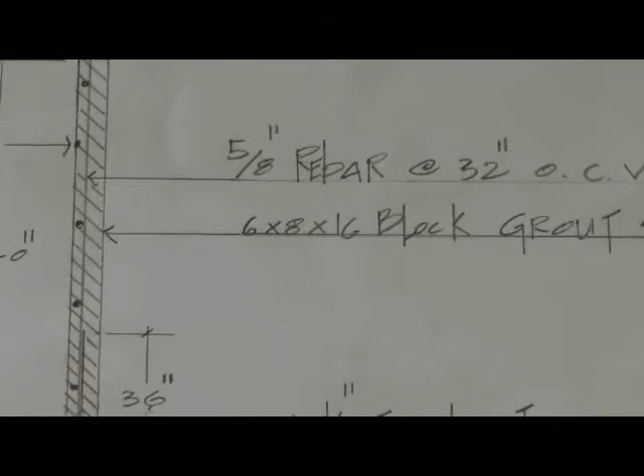That's hopefully what they'll do. I'm hearing stories that they're not grouting every cell or whatever, but over here, and I know in Canada, we probably do things a little bit more solid than they do anywhere else in third world countries. But hopefully the Lord will provide for them to grout this wall solid. So it's very, very important that they try to grout solid. Every cell, the whole distance of the whole building, grout, grout, grout, the whole building.

Okay, CJ? So that's real important. Now, so here we have, let me catch myself up here. Remember I showed you detail 1, and I just showed you that detail right here of how we're going to build it, how this thing should do. And then here's the total height.

I put a note here, CJ, it says see note A. Now I'm going to shoot over camera to note A. Okay, and it says here, build wall to 3 feet bond beam, grout entirely to top of cells prior to continuing to 10-foot height.

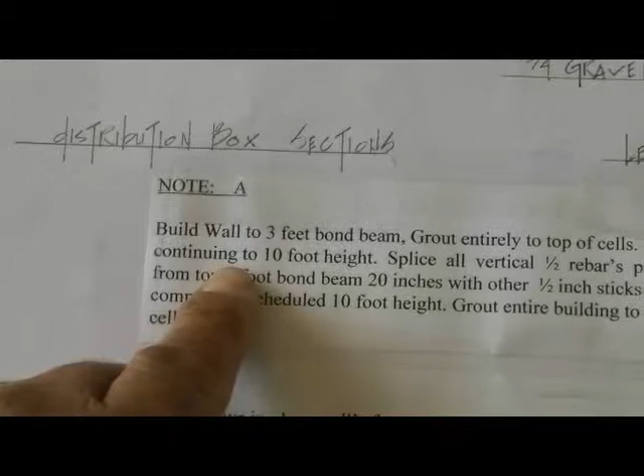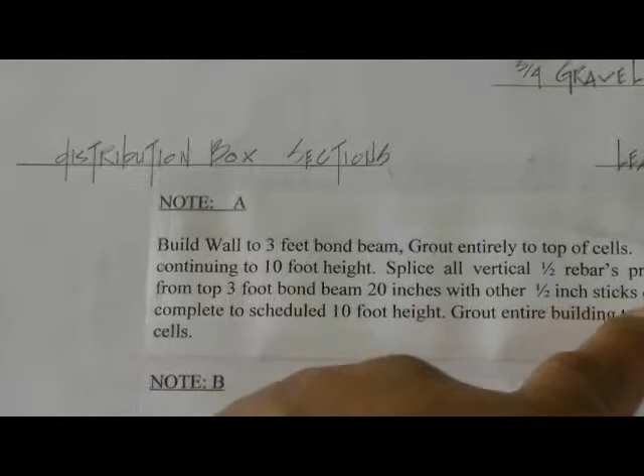Splice all vertical ½ rebars protruding from top of 3-foot bond beam 20 inches with other ½ inch sticks of rebar, and complete to the scheduled 10-foot height. Grout entire building to top of cells. I'm hoping you guys will be able to do that, and there's a budget for that.

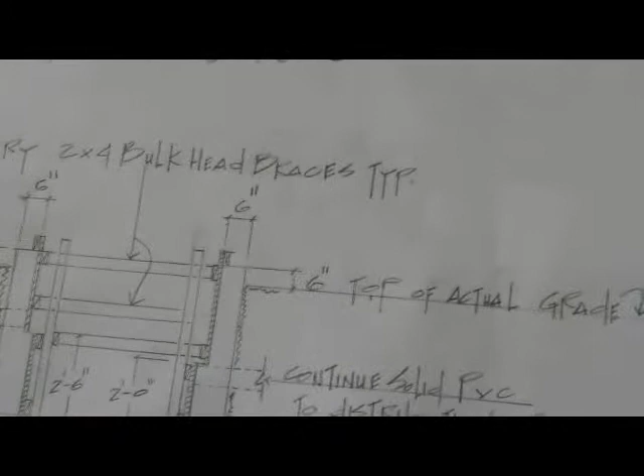Now, so follow the notes, okay, buddy? Follow the notes, and this should perform well. Now, let's go to detail number. Remember on the other page I told you that I showed you a little the septic tank, and it said section. Let's go back to that.

Here it is right here. I said I have section 1, section 2, section 3, section 4. Okay, now that's on page 1 that shows the complete layout. Now let's go to the page we just came off of, and here's the detail to put those walls together.

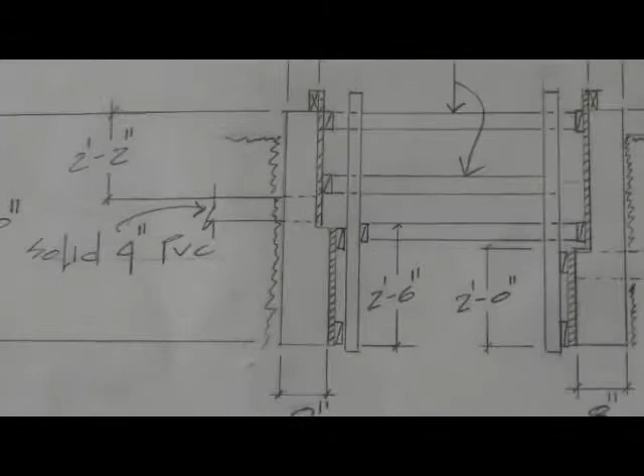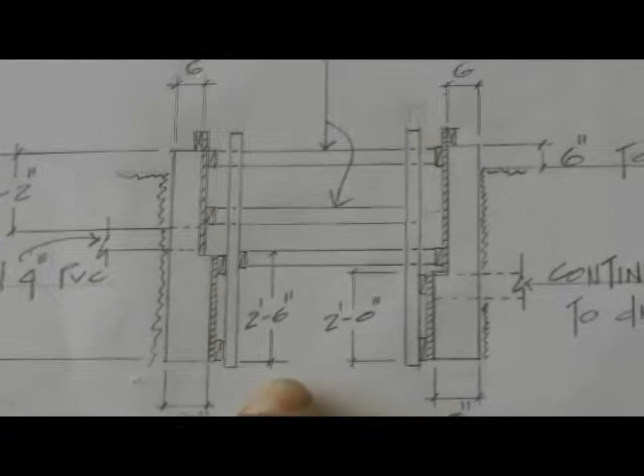Now, CJ, this is detail number 2. Now, try to pay attention as closely as you can, because without my knowledge of them knowing how to do pour in place, it's very difficult for me to try to just depend on what skills they have down there. So the Lord put it on my heart to go ahead and show them how to form this thing up. It was a little bit more work, but I think it's necessary.

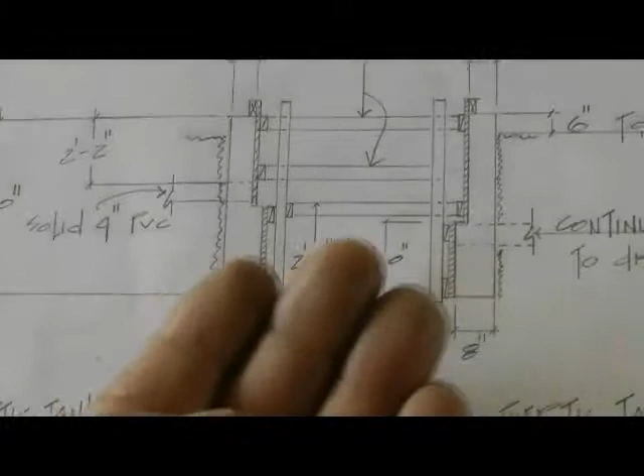Now, this is section 1, this is section 2, okay? They're going to work opposite each other because they're going to be part of a marriage that has to be built first before section 3 and 4. Now, if you notice right here, CJ, it says from the top of the, first thing we're going to do is see this little squiggly line. That's the pit you're digging. All right, it's going to be here, and it's going to come up again.

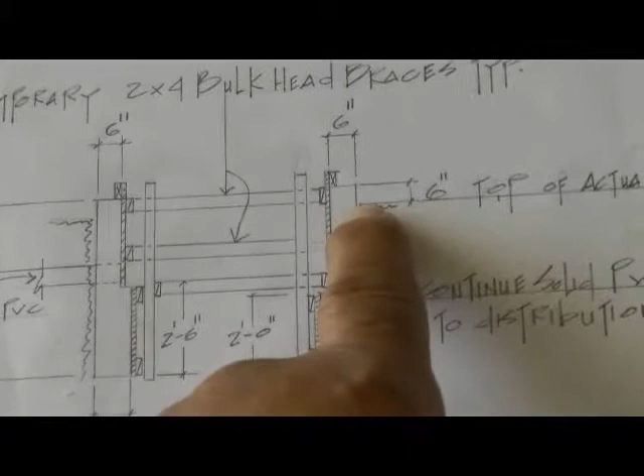It says here 6 inches top of actual grade. That means that the top of this septic tank will be sticking out 6 inches from the top of grade. So that means everybody's going to have to dig down 5 feet, because the whole entire thing is 5 feet deep. Okay? Now, one note I need to mention, and please don't let anyone forget this.

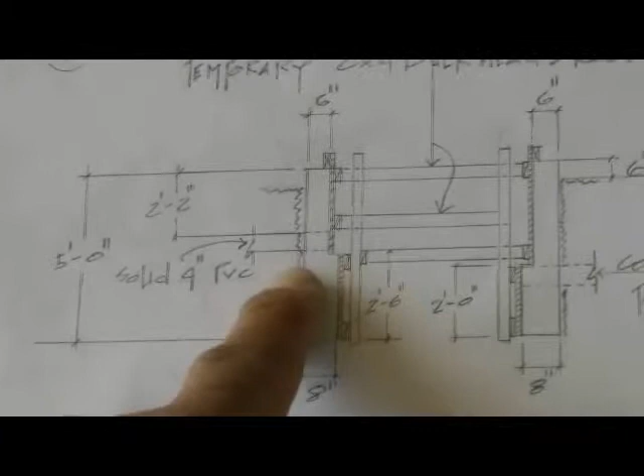Who's ever going to be pouring this thing, after you've pretty much formed, what this is here, let me just go here. Temporary, it says here, see these arrows pointing to this piece of lumber and this piece of lumber? If you'll notice where it's coming from, the note says temporary 2x4 bulkhead bracing. It's typical. So we're going to, whatever kind of system they have down there to hold this piece of plywood.

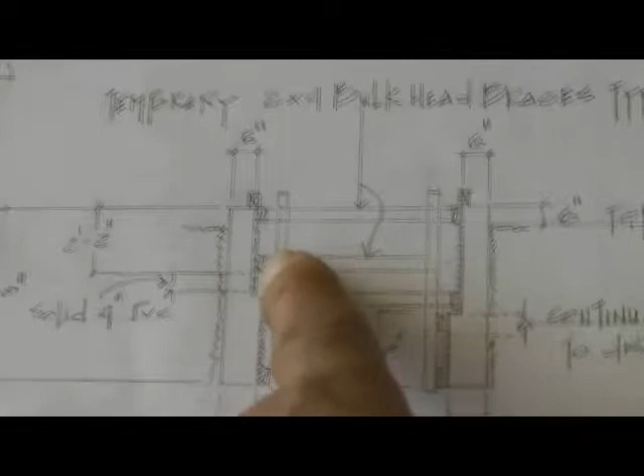See this plywood right there? It's hatched. That's all it is, plywood. I don't know what you guys have there, but anyway, that's what that basically is, plywood.

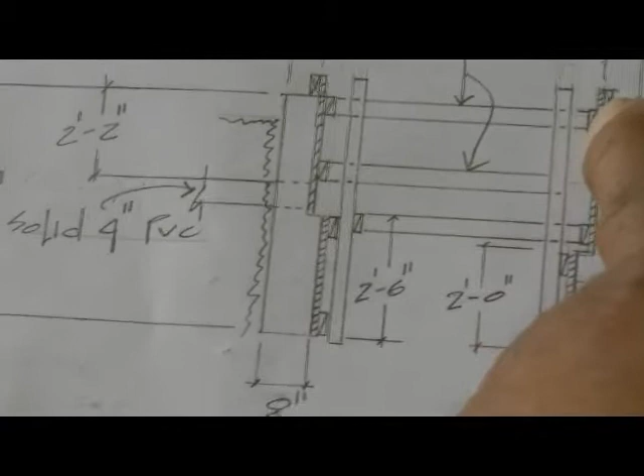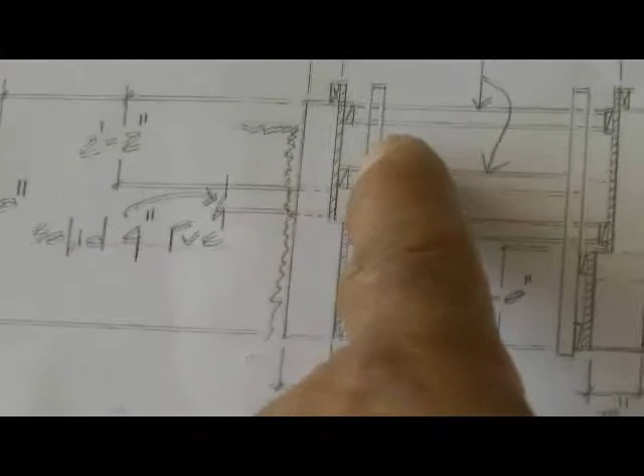And this is the 2x4, and it's holding this piece. This 2x4 here is running crossways, and so is this one here, and then this one here is nailed into that one, and they're probably going to be nailed in maybe 16-inch on center, so they press against both sides, because after you dig the hole, you got to establish this plywood in a place so that this becomes 6 inches, and then you're going to pour this thing.

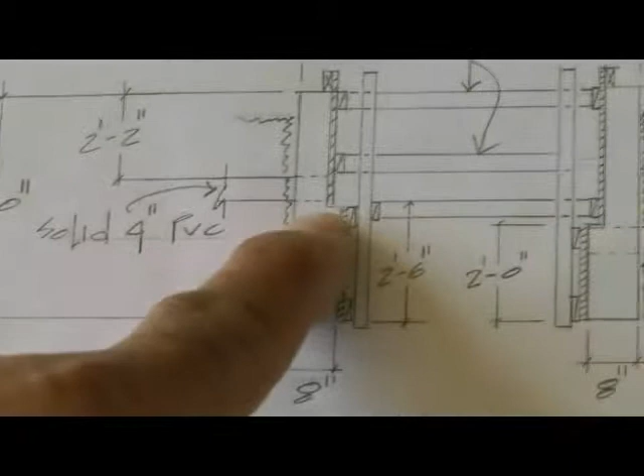But before you do, note here, this has a little pedestal sticking out, and this one here is a little bit higher than this side. Why? Because we're going to try to design a plate or some type of a basket system that can set on this to here with a little bit of a slope angle on it.

So that when the debris comes in, this solid line, it says there's solid 4-inch PVC, and this debris is coming in from the bathrooms. So when the debris comes in, the liquid's going to drop, and so is the solid waste, the toilet paper, what have you. And we're going to be able to pull this basket up later on, and they'll be able to burn the material, but yet the liquids will settle down into the bottom of this thing.

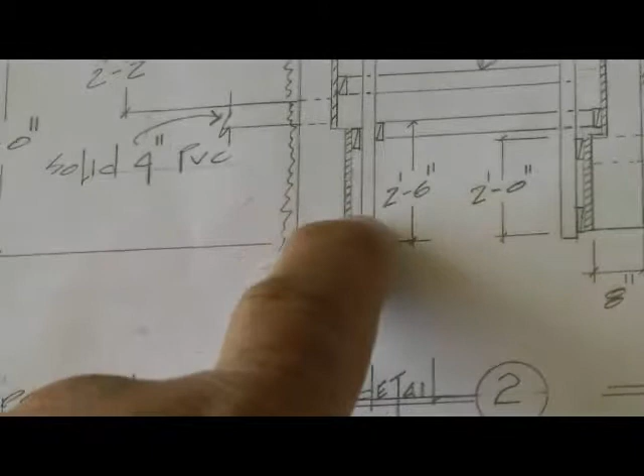Now, the bottom of this thing, I don't have a bottom on it because I needed to put these numbers in here, but the bottom is really about right here. So we want it to be about a 4-inch thick piece of slab of concrete, the rest of it dirt, kind of sloped in this configuration, so that when the liquids drop from here to here down into this basket, into the well, they'll be able to drop.

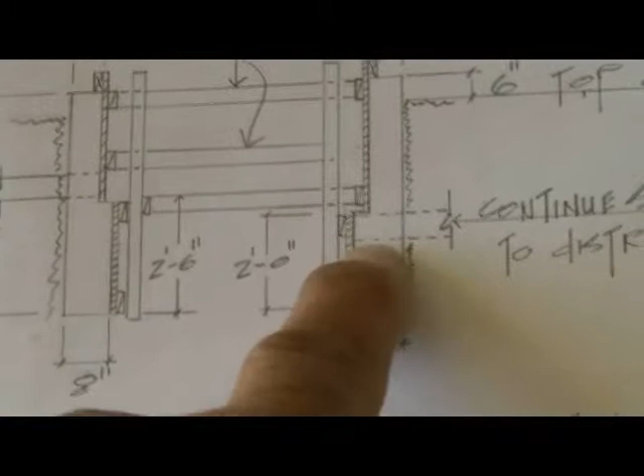So see here, it says here, continued solid PVC to distribution box. Now, this pipe is just below the drop, so that means the slope will be from the bottom of this to the bottom of this. So it'll be about from here to here, be 4 inches, and then the rest of it is all dirt. But we just want to maintain that slope.

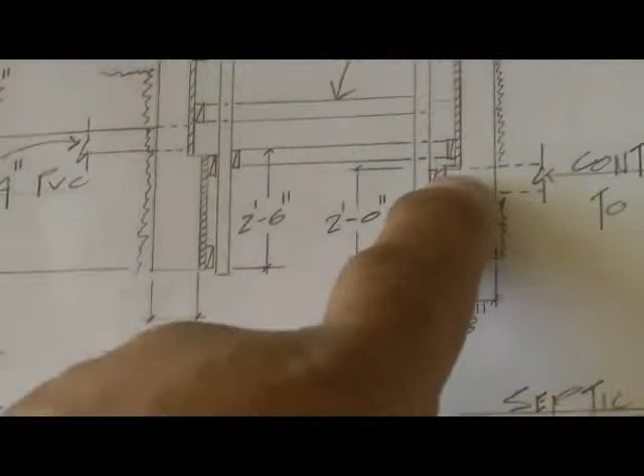So if you set your form to 2 feet this side, section 2, set your form to 2 feet 6 this side, section 1, you'll get this slope in here, and later on they can design a basket that'll set into this little ledge, so that later on when they pull the lid off of the top of this thing, they can take that basket out, burn the debris, put the basket in, and let the liquid take over from there. Okay, so that's the idea there.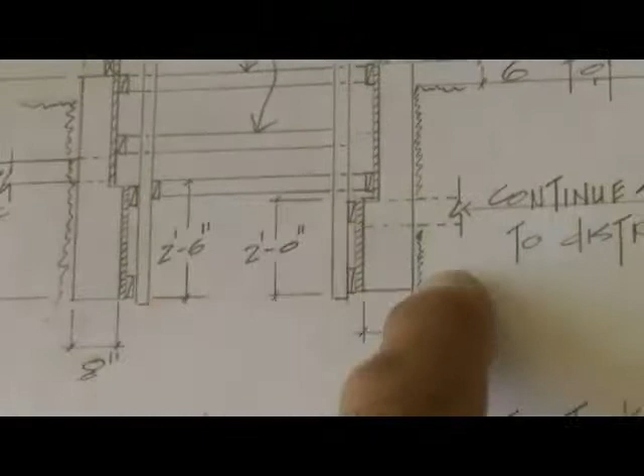Now what I've done here, CJ, I've established 2x4. Okay, it says here 1/2-inch plywood bulkhead. This is typical all around, and this is what it looks like in cross section.

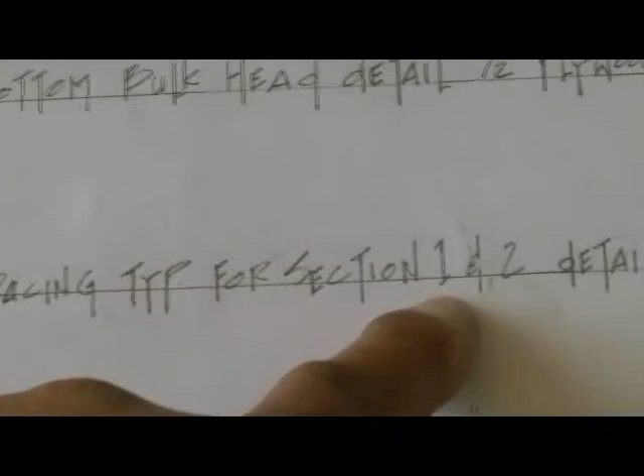Let me see. Yeah, so we're dealing with the same section here, section 1 and section 2. So this is the plywood. It says bottom bulkhead detail, 1/2-inch plywood right here. Now see these cross members here? This is 2x4 used for bulkhead bracing.

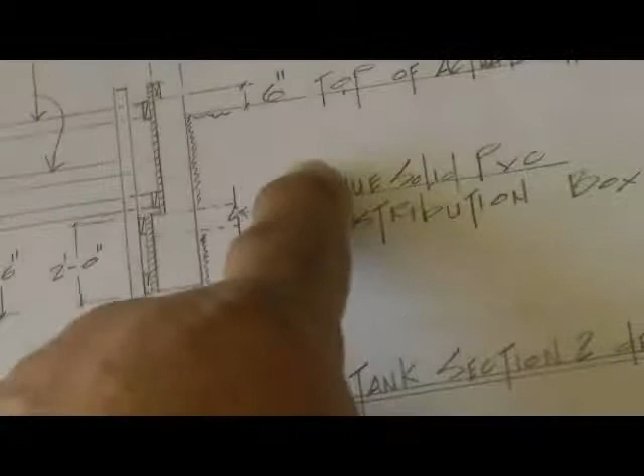Here again, 6 inches top of actual grade. Everything is pretty consistent with detail 1 as far as the grade is concerned, except for this is the cross section. So this is looking at it. This would be looking at it. On the other side of this plywood would be the finish face. This is where our pipe is, a solid 4-inch PVC.

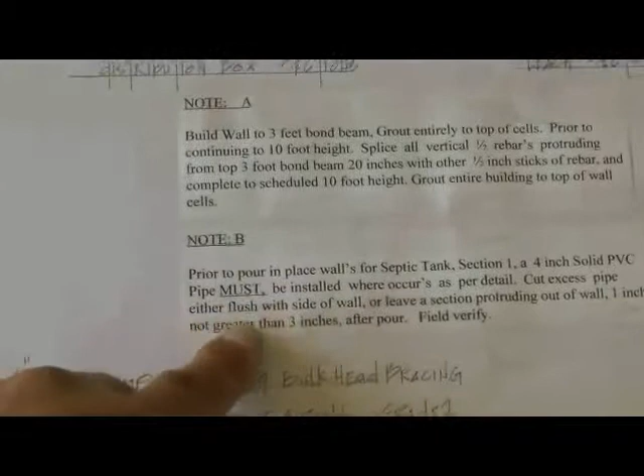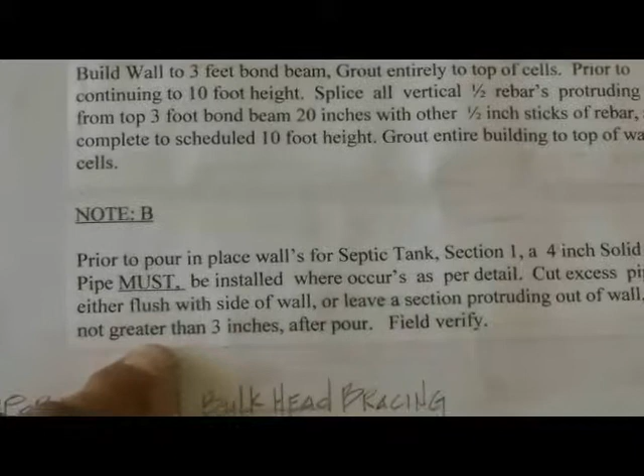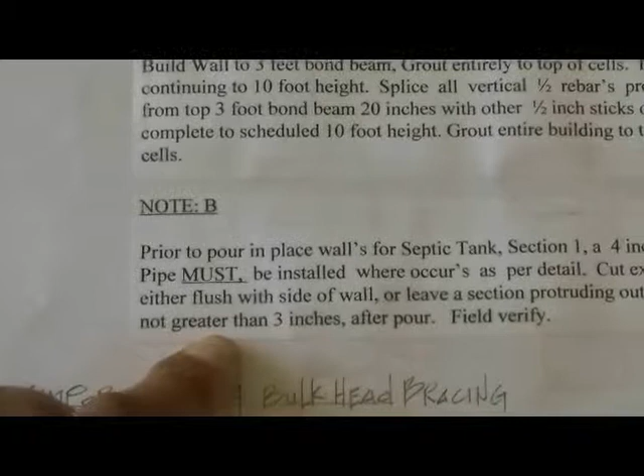Now here again I have a note here, see note B? Let's shoot over to it. Here we are, note B, and let me read that for you. It says here, prior to pour in place walls for septic tank, section 1, a 4-inch solid PVC pipe must be installed where occurs as per detail number 1. Okay, and then you cut the excess pipe either flush with the side of the wall or leave a section protruding out of the wall 1 inch or not greater than 3 inches after the pour.

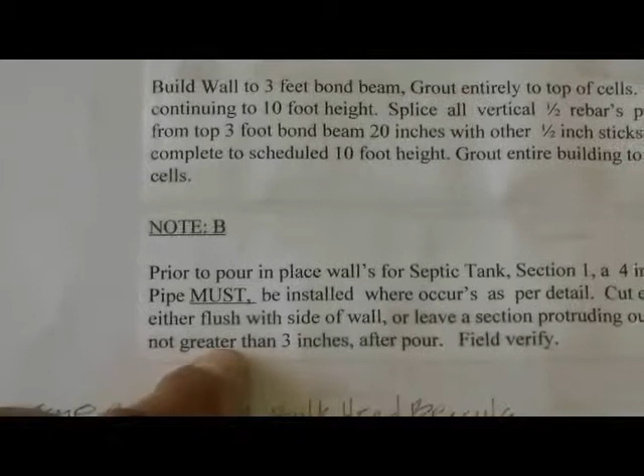You field verify, meaning that once you get that pipe set in there, okay, run it out about 3 inches or whatever, just leave it in there in the pour. Pour your mud and everything. Then when this section's done, then you can cut it off, either flush with the face of the finish or leave it out a little bit, as long as it's out enough to drop into the basket.

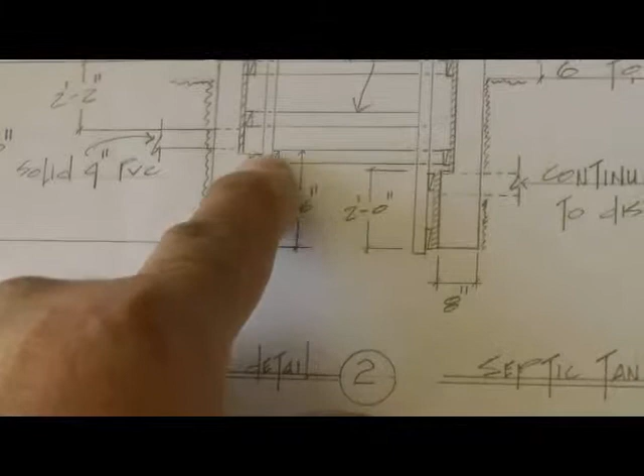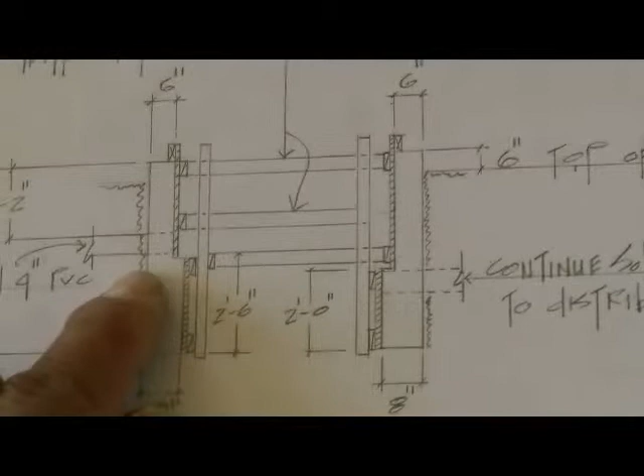So that's basically what that note means. It's important that we set these pipes in prior to the pour. Hopefully they'll have some sort of concrete cloth, protective cloth to wrap around these pipes. I don't know, but anything will work to encase the pipe if possible, because we don't want direct concrete on the pipe itself if we can help it.

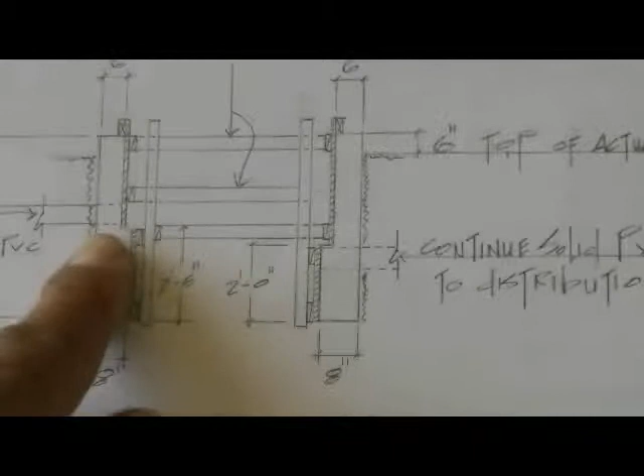So if you can find some sort of covering to shelter the pipe before the pour, so it stays in there, the concrete that surrounds the pipes isn't going to destroy the pipe over time, that'll be a good thing. Try to maintain that thought, okay?

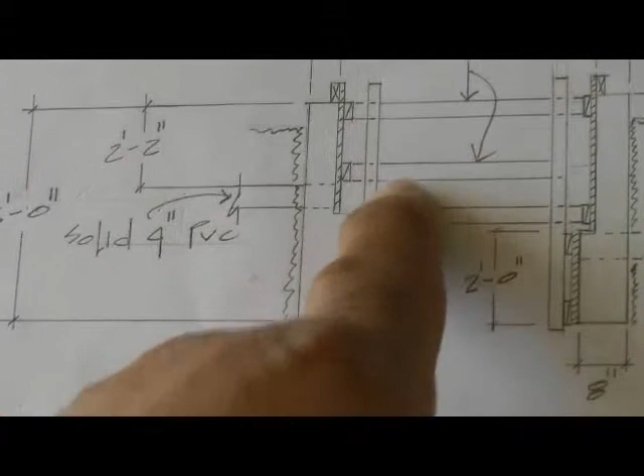Again, after we set this pipe in before the pour, all this form stuff, the pipe will be in there, the ditch will probably already be dug back in here somewhere, so this pipe will be able to lay in there sticking out, and then you'll cut it later after the form's all done. I'm sure you got that now, okay?

So basically all this detail shows you, CJ, is how this thing should be constructed. I'm not sure what their ability is to do pour in place like this, but this is how we would do it here in the States. Okay buddy? So if I go down, I'm just basically showing the same thing for sections.

This is section 3 and 4. There's no pipe in this one, it's just the walls. So this would be section 3 and 4, it's just basically flat wall. And here again is the section, see it says nothing protruding from it, nothing protruding from it.

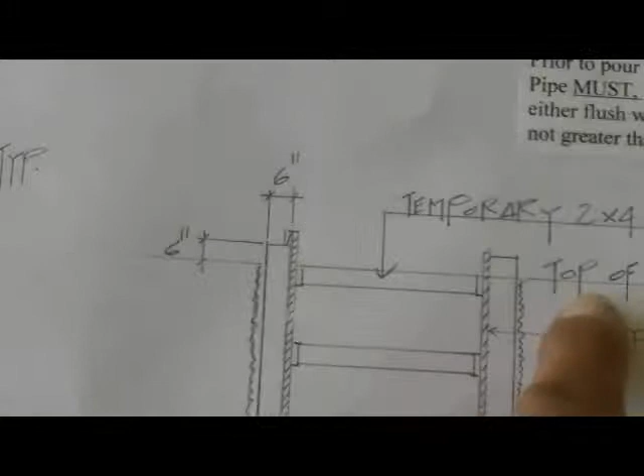Here again, I'm just showing you guys, here you got this squiggly line which is the ditch that you're digging down, which is a 5-foot deep ditch. It's all consistent, 5 feet deep. I'll put this number in here later, but right now it's not there.

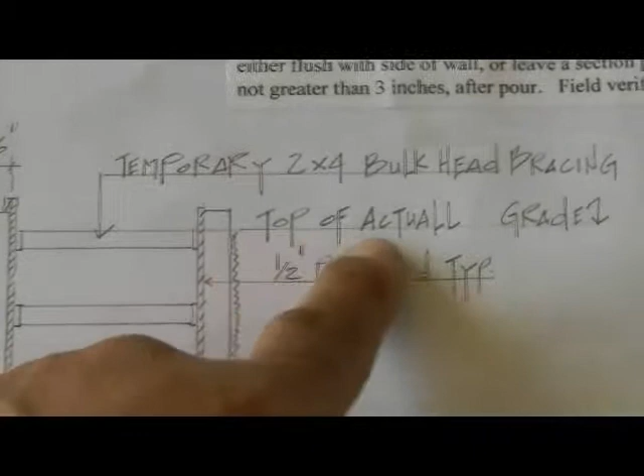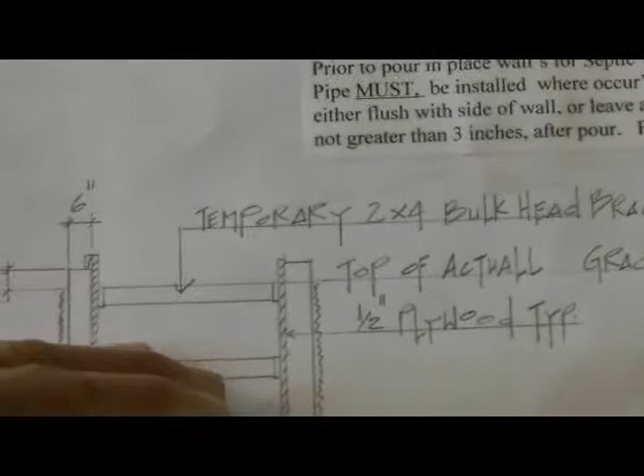Now, there is an option also, CJ. I've noted here, top of actual grade is 6 inches. Well, if we wanted to, we could bury this whole thing 6 inches below, and then put dirt over the top of it, and still have a lid on it. The reason I'm saying that is because this way, the dirt can also act as a sealer for any smell.

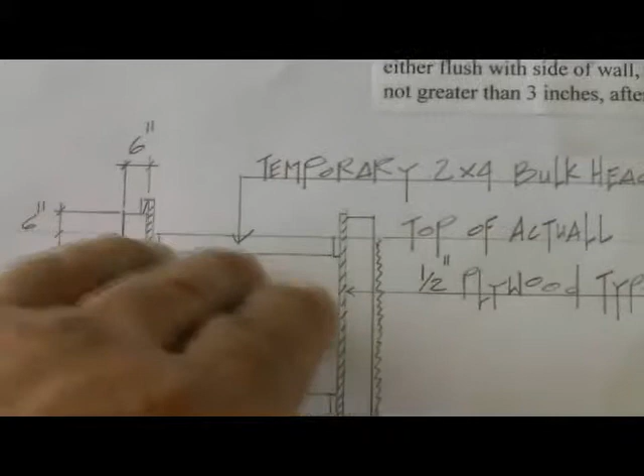So that can be taken into consideration. In other words, dig this thing down even 9 inches deeper, so the top of the wall can be 9 inches deeper into the grade, and then just put it over the dirt, and there'll be some sort of system, your physical system knowing where this thing is, so when it's time to clean it up, brush away the dirt, pull the lid up, pull the basket out, clean it, and then put it back and put the dirt back over. Option 2, okay?

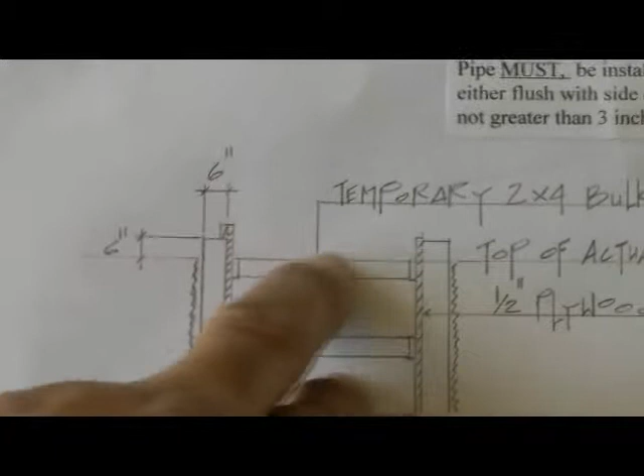Actually, I like option 2 better than this here, leaving this thing up above, because then there's always going to be this constant fear of continual smell. And even here in the States, when we have the privilege of having water cleanup facilities, we still smell debris. So take that into consideration, okay?

All right, so anyway, let me see anything here. Okay, now let's look at these other details. I showed you the section drawing. CMU stands for Concrete Masonry Unit. That's a typical nomenclature we use here in the States to call what a wall is, okay?

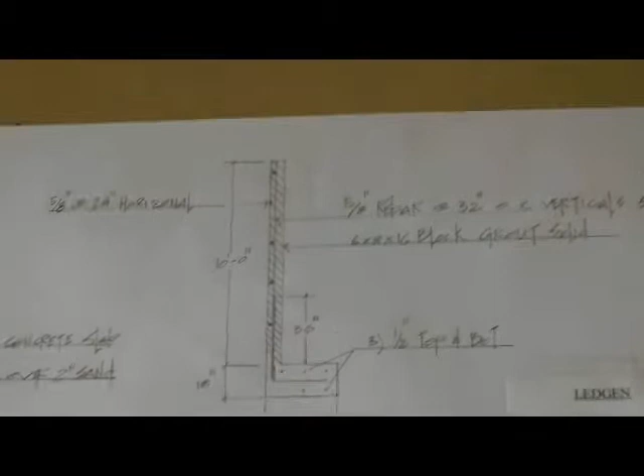And in this particular case here, we're going to build this wall to 10 feet high because this will be the top of the wall. Now your pitch is going to go up like this, okay? This is how the footing got to look all the way throughout the whole thing.

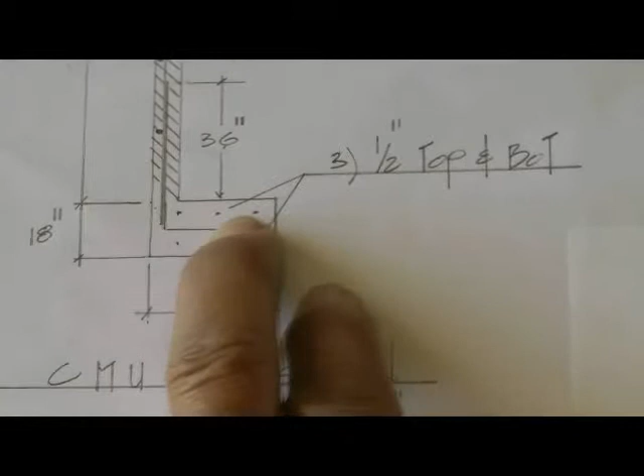Now, I've noted here where we want our rebar. In the footing, we're going to use 1/2 inch, but in the actual raising of the wall, we're going to use 5/8 rebar. Also, we're going to use 5/8 rebar on the horizontal. Now, if they can build this thing that way and grout this thing, they're going to have a better chance of surviving any of those volcano shakers that may come periodically.

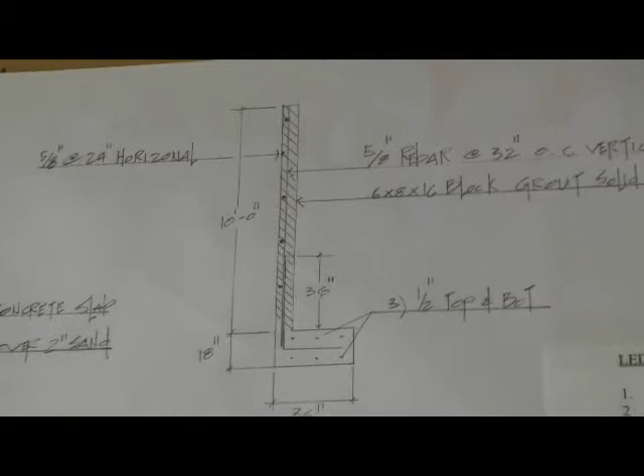So I had told Pastor Mike that when I design this thing, I'm going to design it primarily to be able to take on any of those attitudes of the earthquakes, the volcano that might want to show itself on a periodic basis.